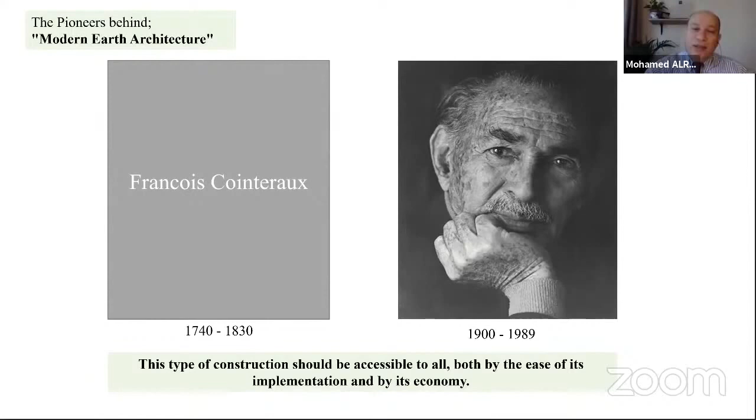And now, after hundreds of conferences held and tens of years passed and thousands of research papers carried out, and meetings and workshops, did we really keep or achieve the goals of those two legendary architects? Did we deviate from the route?

I'm sorry to say, unfortunately, yes, to some extent. This is my opinion. I will say why.

Because when we find this statistic - this is a very recent statistic - it says that we have about 150 million people living in the street without shelter. And we have 1.6 billion people living in housing that is not suitable for human habitation at all.

And this is totally against what they believed all over their lives. I wonder how we failed to secure proper houses for those people, and also how we failed to secure proper roofs for them.

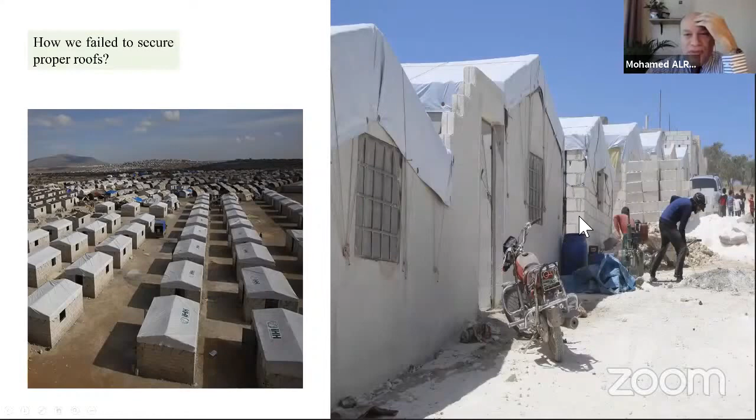These images show a camp for Syrian refugees held in the southeast part of Turkey. They constructed the shelters with concrete blocks, and they didn't find an appropriate material for the roofing. They used tents.

This makes me ask a question: Is it an affordable earth construction? Is it really an affordable technique?

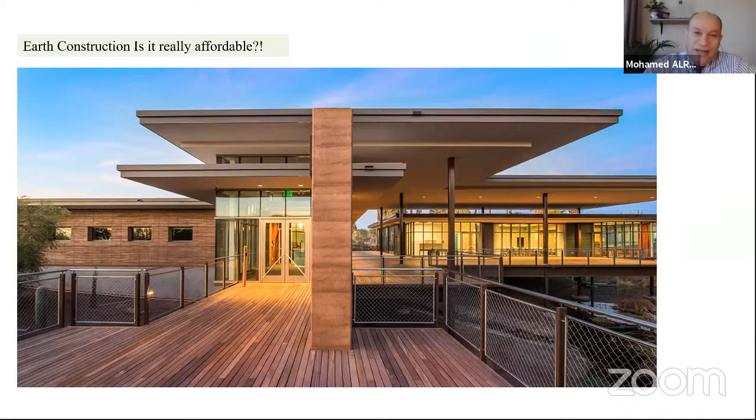The figures astonish me, when we find that the square meter of rammed earth construction costs about between $2,200 to $3,000 per square meter. Is it architecture for the rich, or what?

I have been working in this field for more than 30 years now, and during this time, I developed a formula to calculate the cost of producing compressed stabilized earth block. I was asked by the Saudi government in last March to apply this formula to calculate the cost of producing this material, compressed earth block, in a place called AlUla.

When we applied our formula and fed it with all the basic information regarding the basic elements influencing the cost, we ended up finding that we could produce 1,000 of these bricks for the amount of 474 Saudi riyals. This is about 52% less than the conventional or equivalent fired brick in this area.

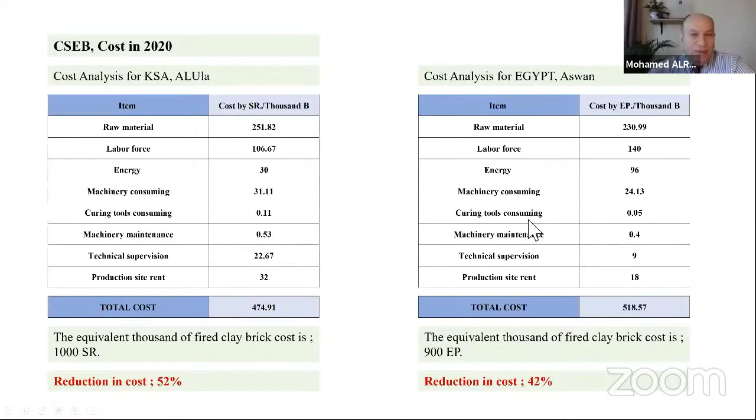So the problem is not related to the material itself. So what is the problem? There is a missing economical aspect here. There is a paradox, really.

When we think - and yesterday most of the presentations said that we are dealing with a most affordable material, it is widely available, and it's very cheap and costs nothing, and so on - so why do we reach the point that it causes these figures I mentioned to you? There is something missing.

Most of the applications we saw yesterday, and everywhere over the internet, don't account for the fact that the ceiling itself may cost about 60% to 75% of the total cost of the structure system. So it doesn't make sense to have just a wall of earthen material, and then construct your ceiling and other elements with different materials. You will never achieve a considerable saving for the total cost by just replacing the wall material.

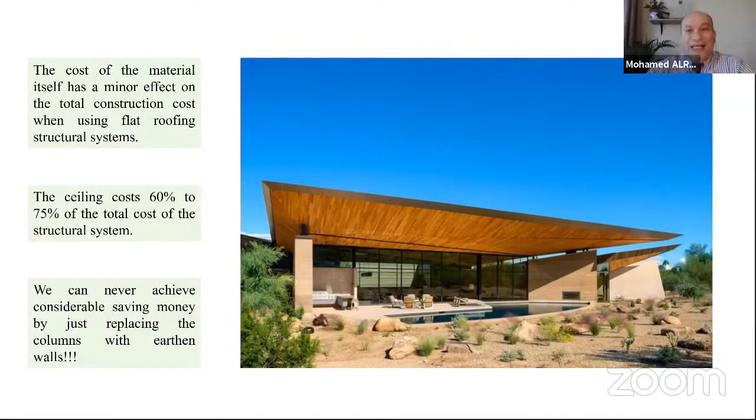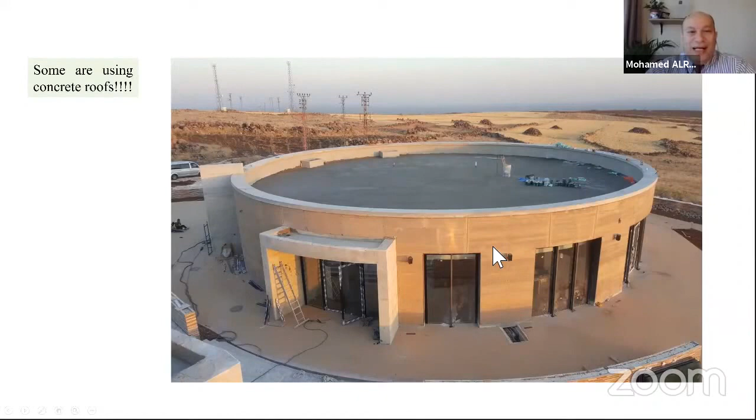And then you say, okay, I built an economical, efficient building. I really wonder when I saw some projects using reinforced concrete roofs over the earthen walls, and that's it. Some of them are using both reinforced concrete elements mixed with steel elements.

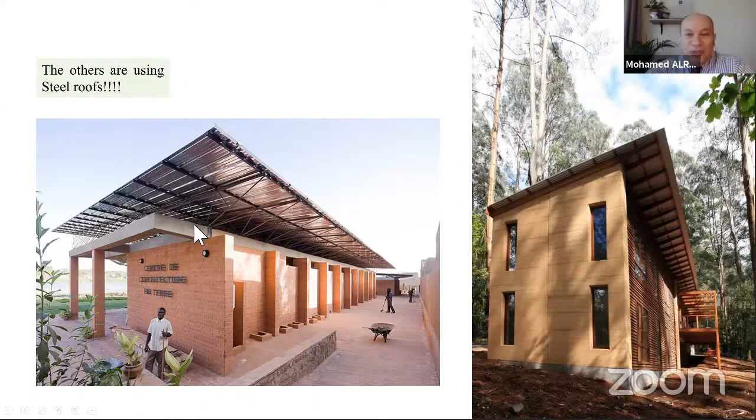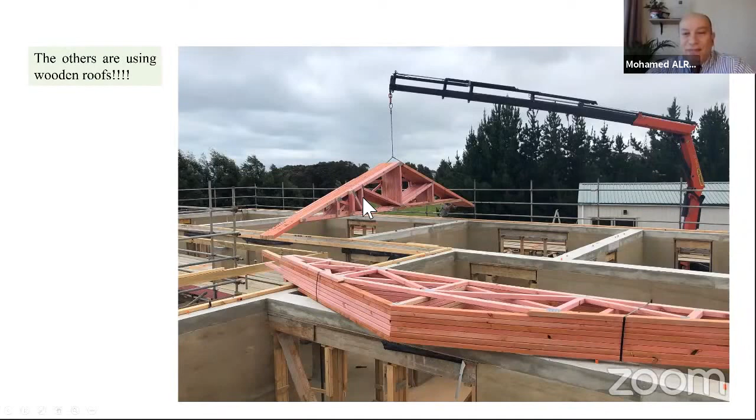By the way, this building is in Africa, and I have a project running now in Nigeria. I know well that this type of structure costs a lot for them because they are forced to import these materials from outside countries. Some of them are even using sophisticated space trusses made of wood. And for the extreme, some projects show that the wall is the only element composed of earth material—there's a steel structure and a flat slab of reinforced concrete for the roofing system.

Oh my God! So how could they achieve any saving or affordability?

To get close to this point, recently we made an evaluation for a prototype we designed for housing in Egypt, and we made three alternatives for this prototype. The first alternative, we designed it with a full reinforced concrete skeleton and used baked red bricks for walls. The second alternative, we used load-bearing baked red bricks, and for the ceiling we used precast ribs of precasted reinforced concrete.

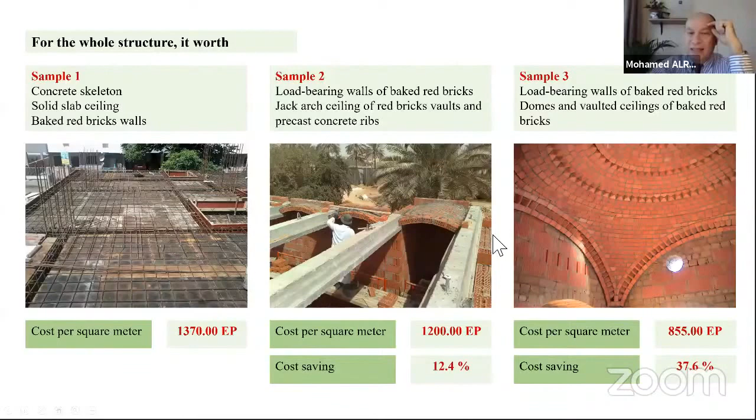It means that we could construct new buildings with earthen material, but with modern application of earthen material, at almost half the price. This is the answer to why it is not affordable, as shown by the new practices I showed you in the beginning.

On the other hand, this technique—most of you yesterday said it is the oldest technique, widely spread in old communities, very popular and vernacular—we took this technique from the hands of the locals. Our role should only be to develop the material and the process, not take it back from them, to be sure it would be proper for new construction but not too complicated. We should be enabling it, not complicating it.

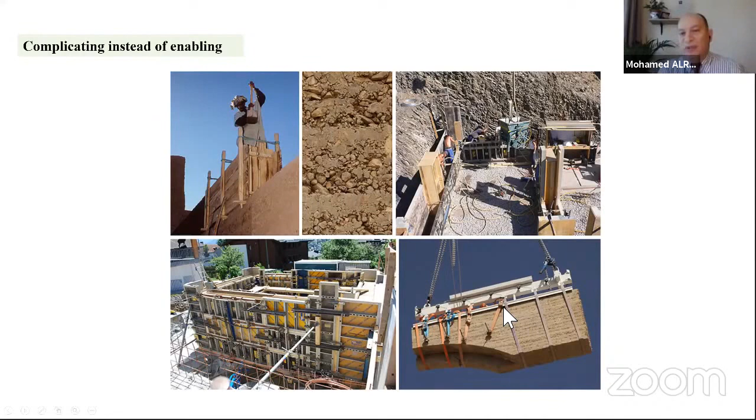It doesn't make any sense to use big precast pieces of rammed earth in construction and use sophisticated tools to do so.

What can earth construction do for locals? As I said, those people used to solve their problems and build without any intervention from professionals since long ago, thousands of years ago. Now, when we develop these techniques regarding material durability and so on, we should enable them again to participate in the construction process by making it easy and affordable for them. So I think modern earth construction should be committed to this goal.

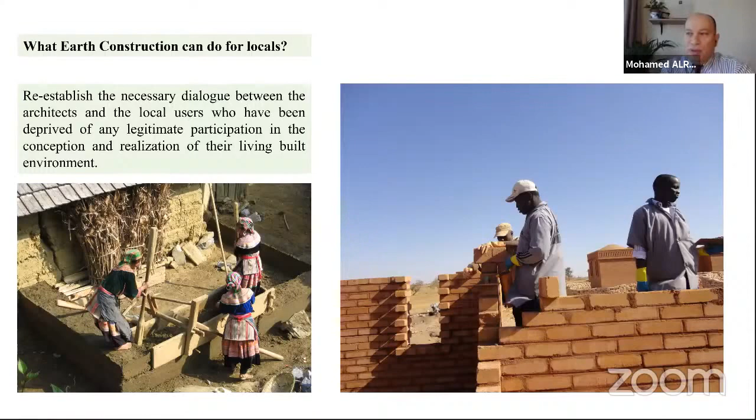What can this do and mean? I think modern earth construction means developing the practice from the vernacular, primitive, as most of you presented yesterday and some of you presented today, the adobe technique, to be professional and reliable.

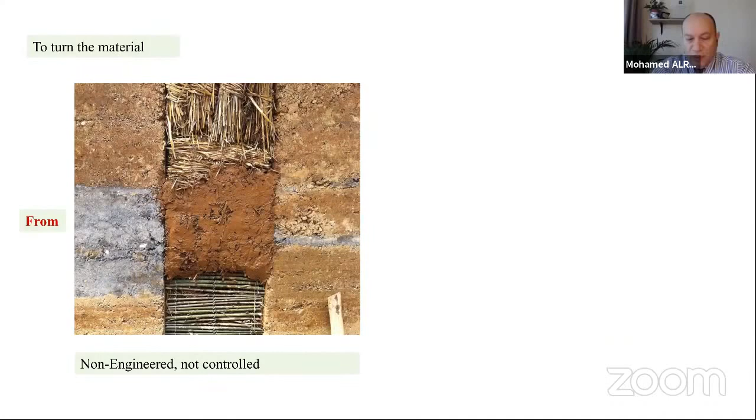And what about the material? We need to develop the material from non-engineered, not controlled. Most of you yesterday presented the damages affecting these materials from weathering, from water, and so on. So it needs to become engineered with controlled properties.

This is what we really mean by controlled properties. We need the material to act according to our expectations, and this is what we mean by becoming an engineered material.

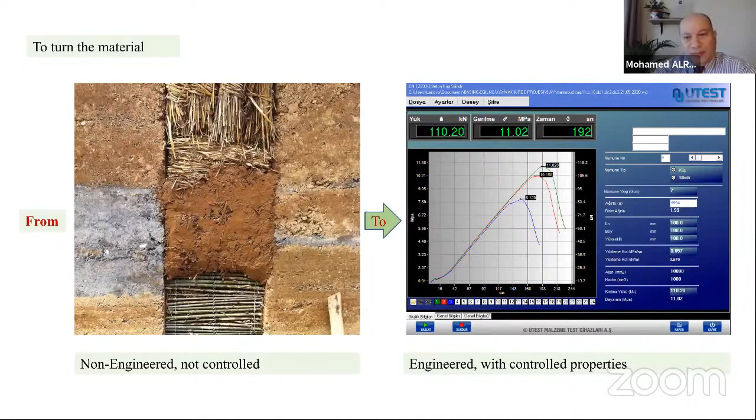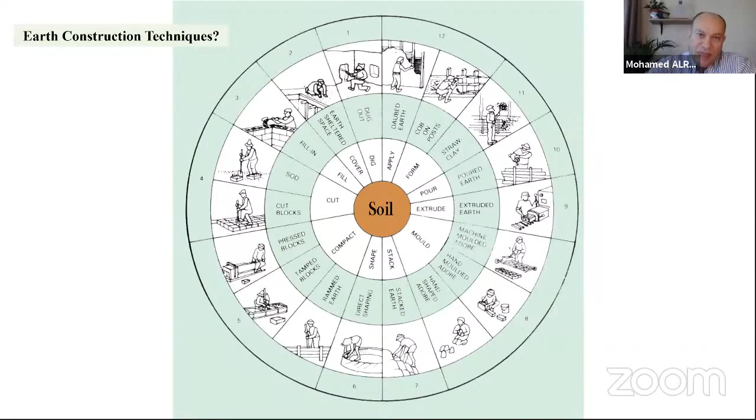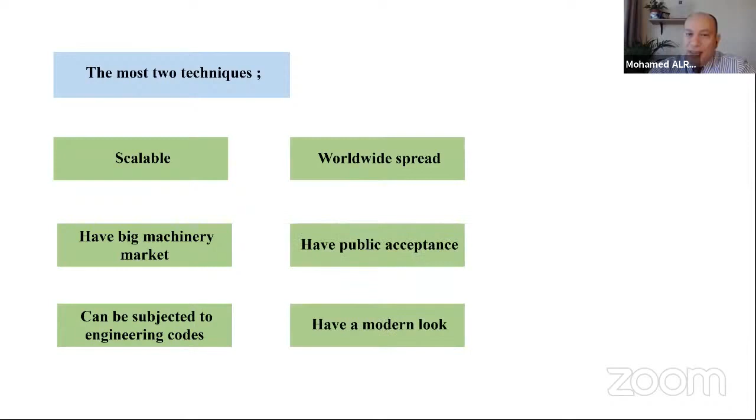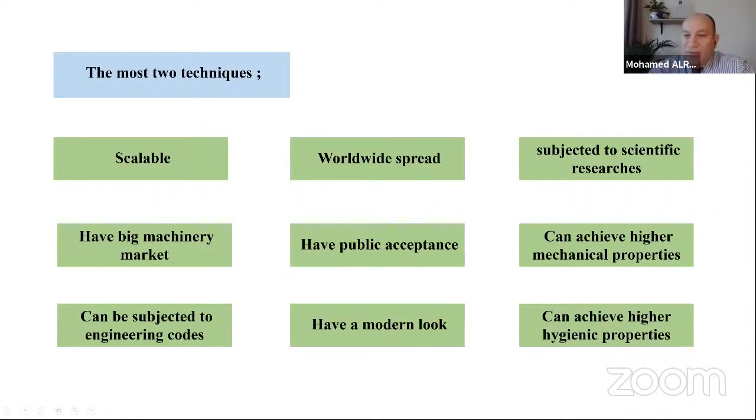Most of you maybe know that we have almost 12 different techniques of using earth in construction. But among all these techniques, we have just 2 that are scalable. They are ready to be developed, have a big machinery market all over the world, can be subjected to engineering codes, are worldwide spread, have public acceptance, have a modern look, are subjected to scientific research, and can achieve higher mechanical and hygienic properties.

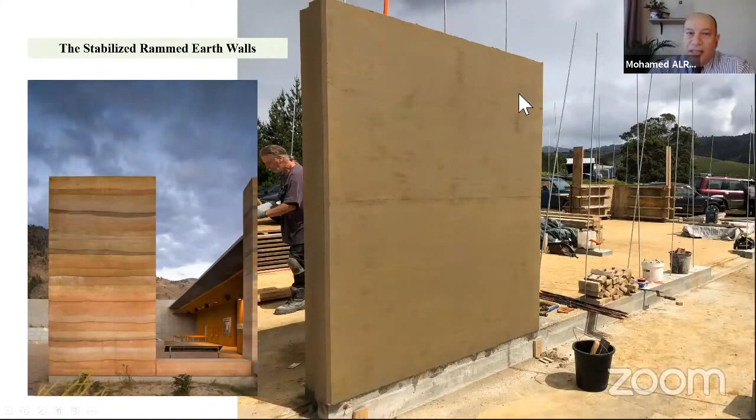Those 2 techniques are the stabilized rammed earth walls and the compressed stabilized earth blocks. There are common advantages of both these techniques.

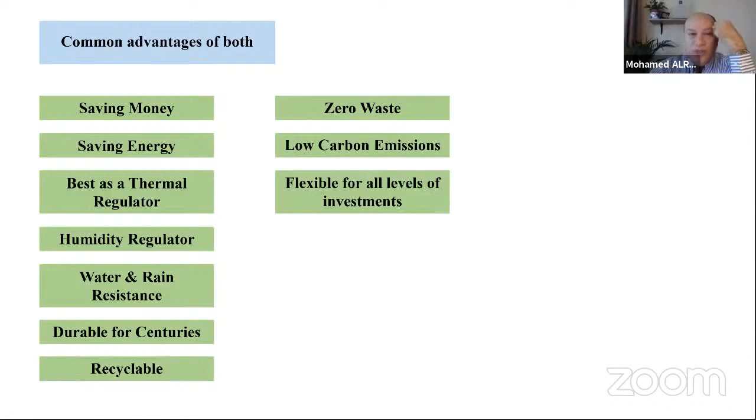They save money, they save energy, they are the best thermal regulators - I'm going to explain this point later - and they are humidity regulators. They have water and rain resistance, they are durable for centuries, they are recyclable, they have zero waste because they are fully recyclable, low carbon emission, and are flexible for all levels of investment.

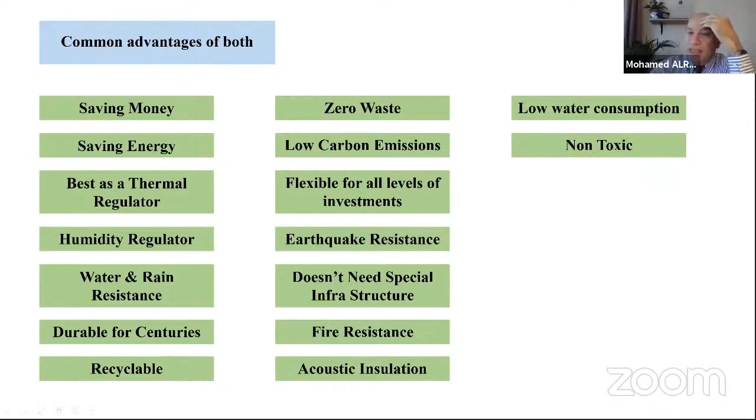They are earthquake resistant, do not need special infrastructure, are fire resistant, have acoustic insulation, low water consumption, are non-toxic, serve as a tool for community development, have simple technology, are easy for know-how transfer, allow on-site production, and are polymorphic. Those are the most common advantages of both techniques.

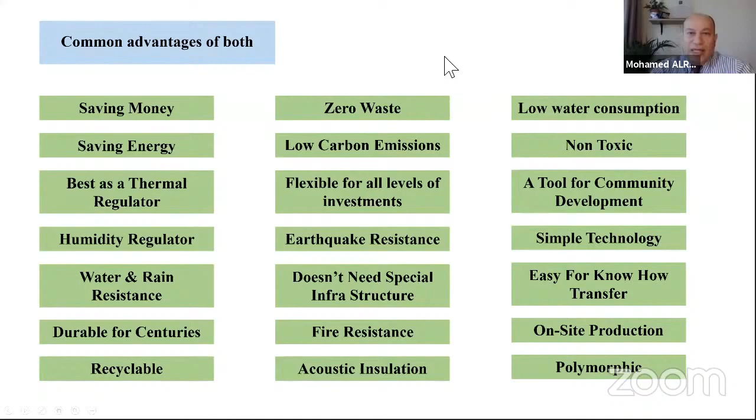But each one has its own advantages and disadvantages. Starting with stabilized rammed earth, what are the advantages of this technique? The major advantage is that it achieves high levels of aesthetics. It's really wonderful, it has a wonderful appearance, especially when we add some coloring oxides.

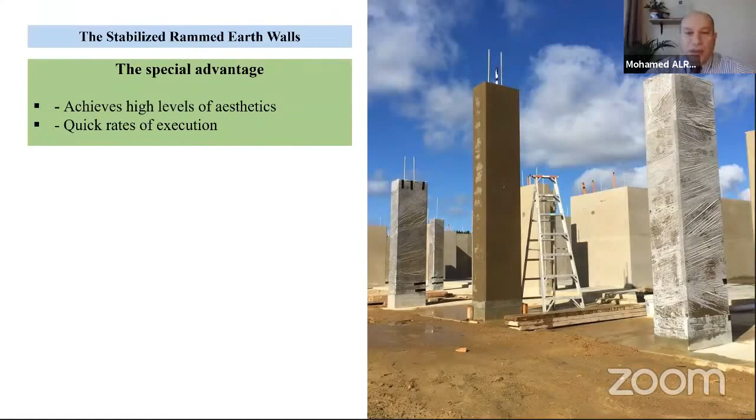When the natural soil becomes different in colors and so on, it gives us an appearance like marble or something like that. And it is very quick in application because you are casting big sections at once. But there is a special disadvantage - it still needs to be treated with this technique.

The first and most important deficiency of this technique is that, until now, it is impossible to make a test for a random sample. You cannot take a random sample of a wall, go to the laboratory, and test it under laboratory test equipment. And it is too difficult to make on-site quality control, because at the moment you remove the form, you already have the produced piece of wall.

So you cannot control during the process. You cannot control how much it is compacted, how much it is fully homogeneous regarding the material, and so on. And it is not suitable for curved roofs.

Remember what I told you in the beginning - if you would like to really reach maximum cost effectiveness and maximum reduction of cost, you have to use a monolithic material. You have to use this earthen material within the roofing system, also the roofing elements.

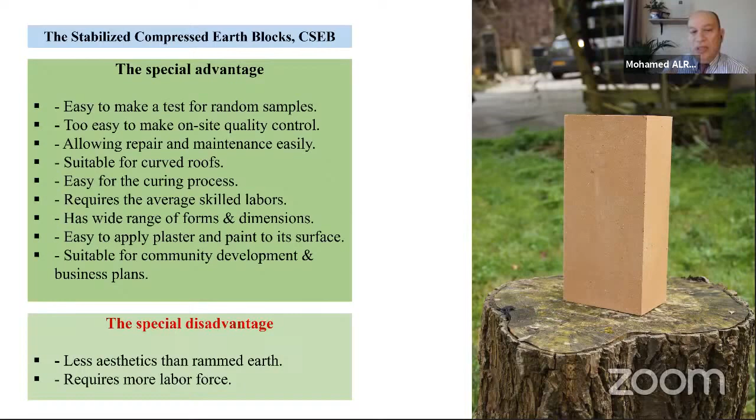In contradiction, the special disadvantage of this technique is that, unfortunately, it is less aesthetic than rammed earth. We don't have this magnificent surface, and it requires more labor force. This second disadvantage, by the way, could be an advantage when we are dealing with communities that have a lot of people who are jobless - so it could turn into a job for those people.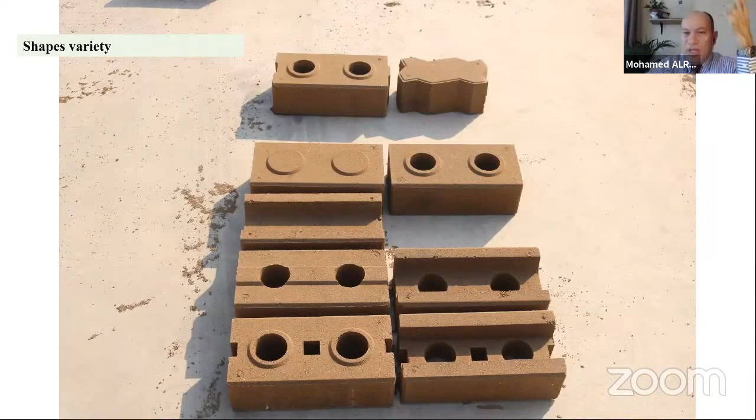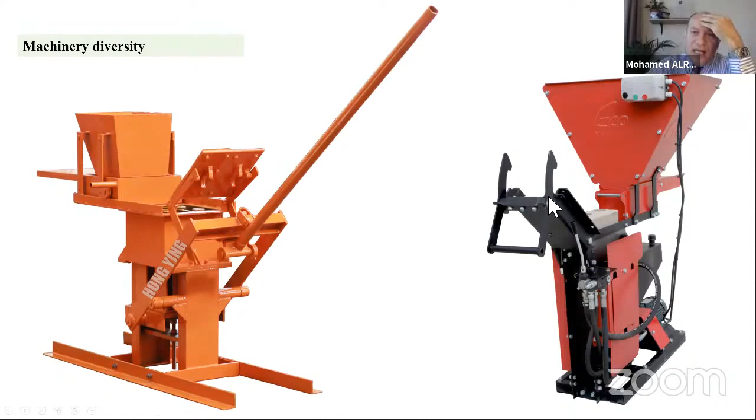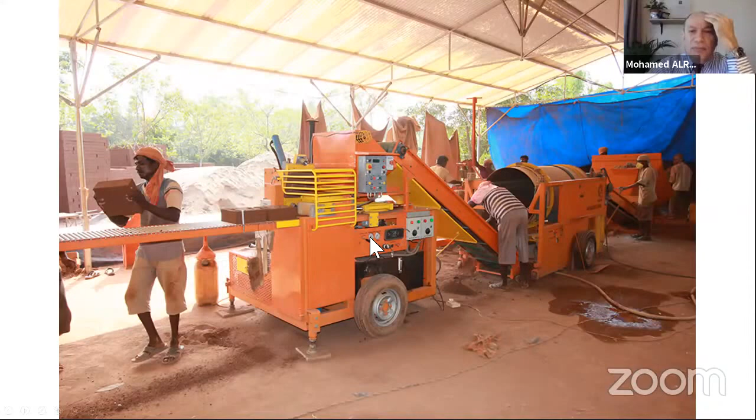There are plenty of machinery worldwide producing compressed earth blocks, starting from manual presses, simple hydraulic presses, to full production lines, like this one in Auroville, India. There are also mobile machines, which means you can produce on site easily - you can just drag it to where you would like to construct your building.

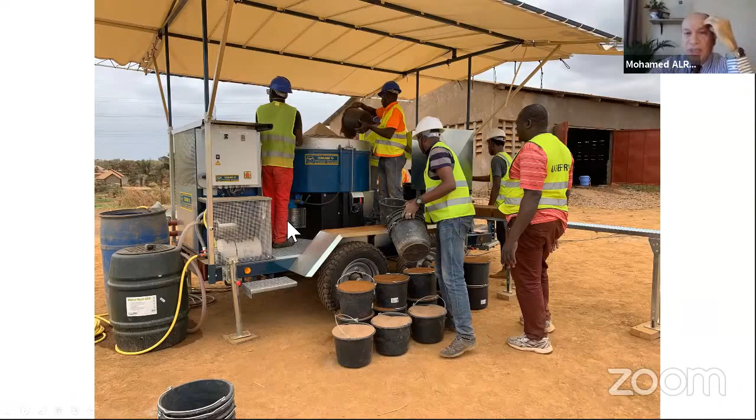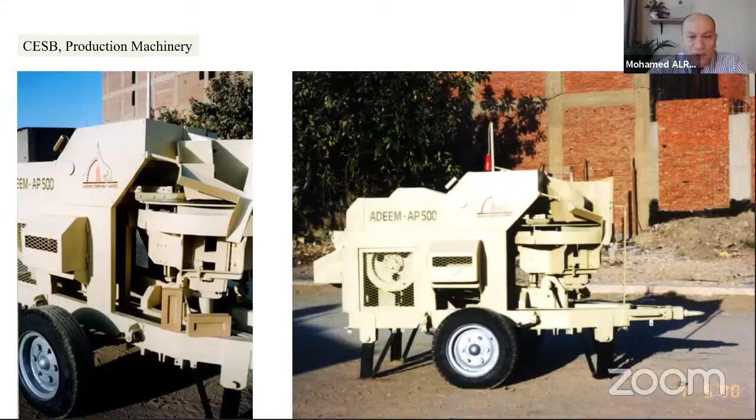And we produced those machines in Egypt locally. This is a good aspect of this technology - the machines are not sophisticated, and you can produce them locally. It doesn't need a sophisticated process; I call it intermediate technology. We produced it locally in Egypt with our labor force and our local materials - we produced the full machines to produce the compressed earth block.

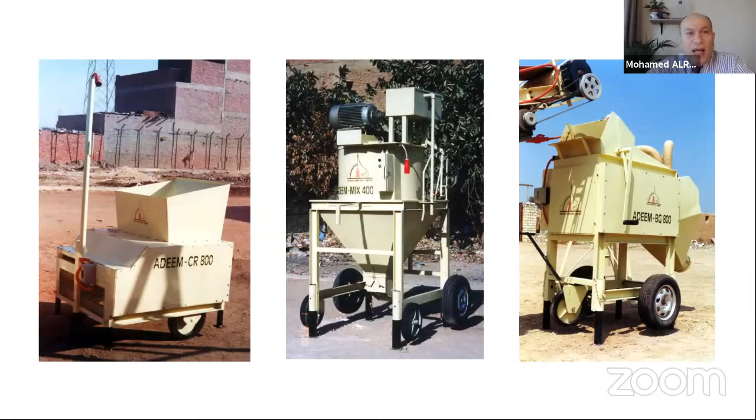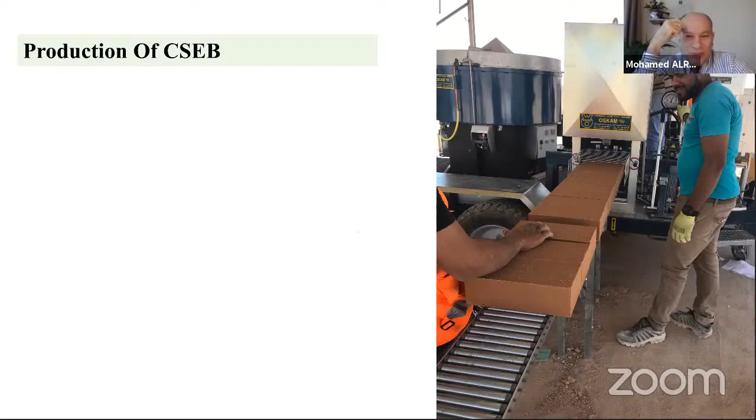Maybe I really, when I saw the presentation yesterday, and I saw most of the presenters focusing on Adobe, I said, okay, I should show them a little bit more about the CSEB production process.

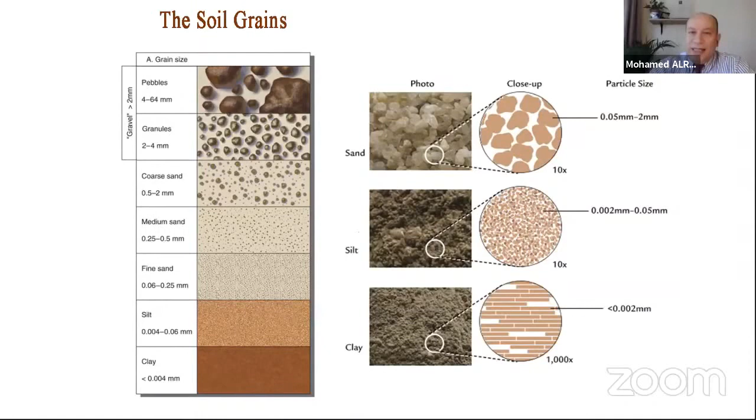Before we start any earth construction technique, we have to understand the soil well, from the physical and the chemical point of view. We have to make some analysis. There are two main tests we have to apply to the soil. The first one is the soil texture, which means the grain size distribution.

This grain size distribution varies from place to place, from one soil type to another. According to this test, we take a decision if we will use the soil as it is, or we may make some modifications for this soil later on.

The second most important test we have to apply to our soil is the X-ray diffraction analysis. It is a qualitative, not quantitative test. We have to apply it to understand what type of clay minerals we have, and this will help us define what type of stabilizer we are going to use to enhance the soil's properties. The stabilizer issue will come in the next slides.

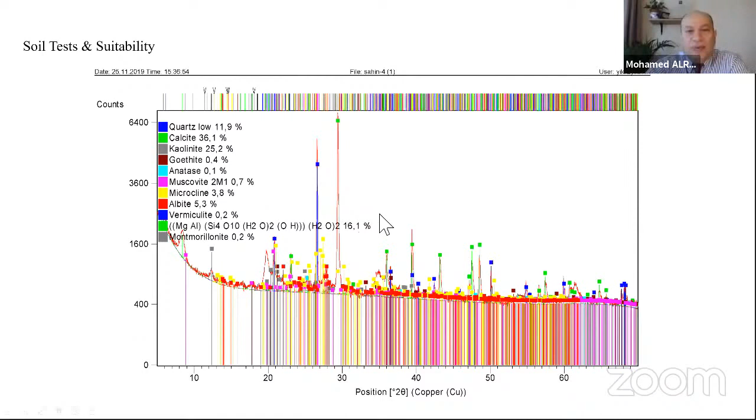There are so many stabilizers available to stabilize your soil and increase its properties. The first and most widely used, the oldest one, historical since Roman times, is the hydrated lime - calcium hydroxide. I say it in chemical terms because it has so many commercial names in different countries, so I'm talking about calcium hydroxide. It is scientifically proven, low economical cost, moderate environmental impact, and an excellent material that could achieve a high performance of mechanical development for your soil.

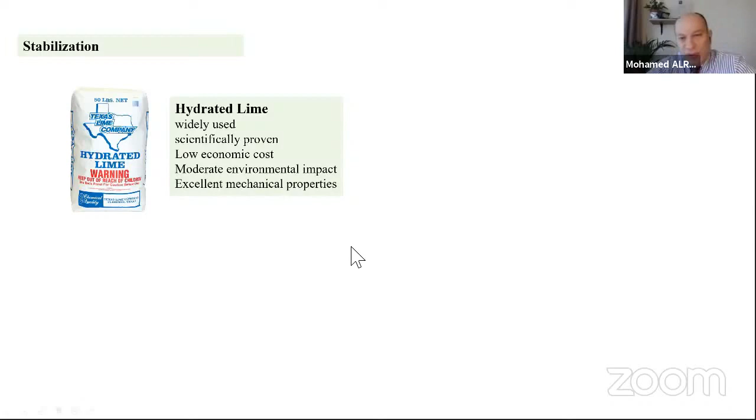The second stabilizer is cement, also widely used and scientifically proven, but it has a negative environmental impact - we know the problems of pollution that come from the cement industry. It also gives good mechanical results.

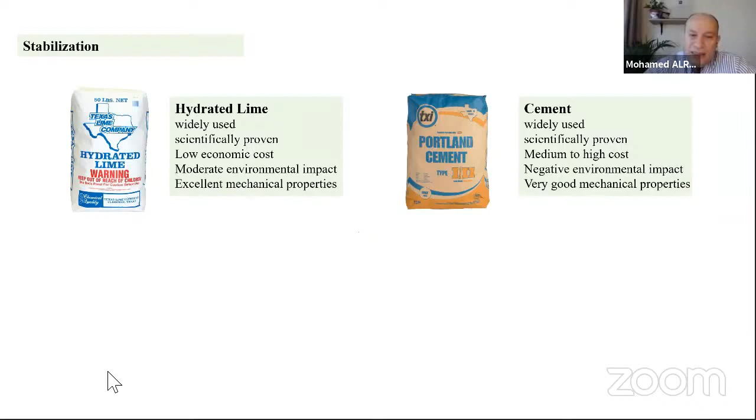The third one is magnesium hydroxide, commercially known as magnesium milk. This stabilizer is recently under research, because there are some disadvantages of using calcium hydroxide, and magnesium hydroxide is meant to develop and overcome these disadvantages. It has the ability to secure the mixture with maximum pH value, and it reacts very quickly and sufficiently with the clay minerals - this is a crucial reaction, the pozzolanic reaction. So it is still under research.

The fourth stabilizer is gypsum. Actually, I'm sorry to say that gypsum is not sufficiently scientifically proven yet. We don't know exactly what type of chemical reactions happen when you add gypsum to soil that contains a clay component. This is why I say it is not scientifically proven yet, but it was used, though it is not widely spread. If you search the internet, you will find very few papers talking about gypsum as a soil stabilizer.

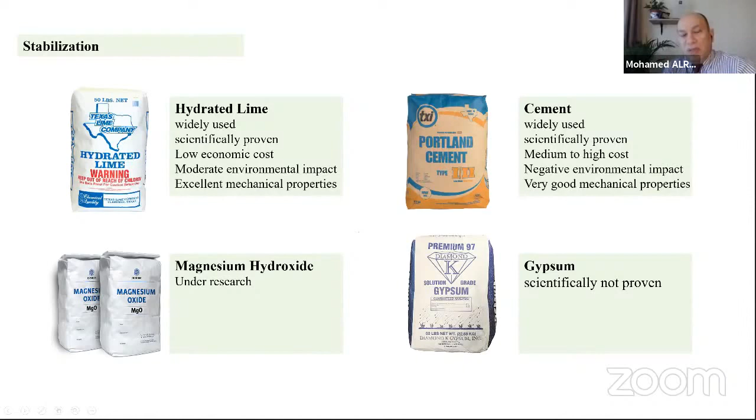What I mean by gypsum - the chemical formula is calcium sulfate. We also used it in recent research here at Fatih Sultan Mehmed University, and it was disappointing to us to see that it has no effect on the water resistance at all.

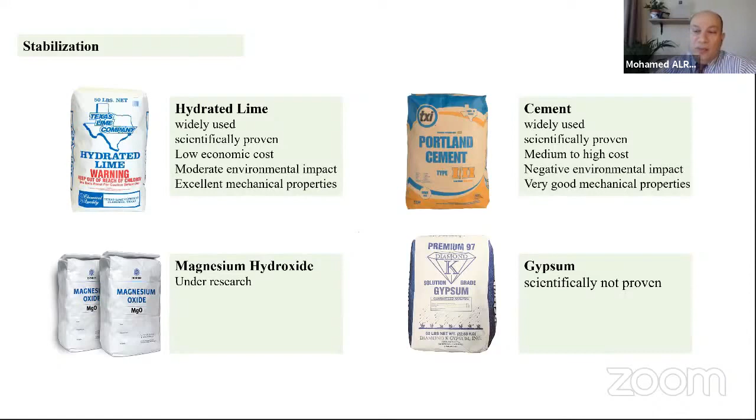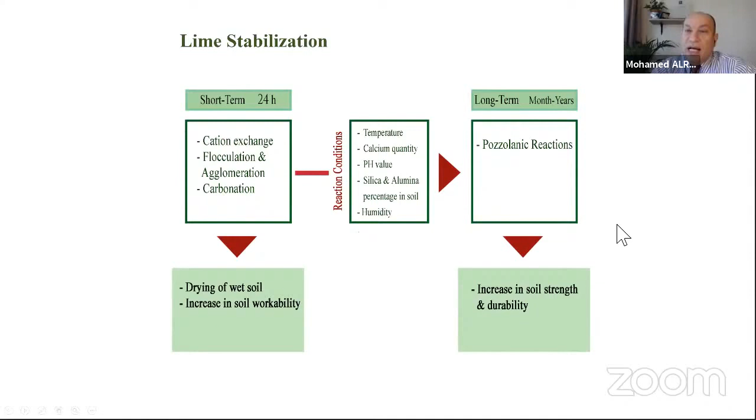This is the equation of how lime stabilization reacts with the clay minerals, passing through two stages. The first, short term, is carbonation, flocculation, agglomeration. Then we have the most important reaction, which takes a long time to occur - the pozzolanic reaction. This reaction results in a sophisticated formula of calcium silicate aluminate hydrate, a type of crystal which is very strong, and this is the element responsible for increasing the soil's strength, durability, and water resistance at the same time.

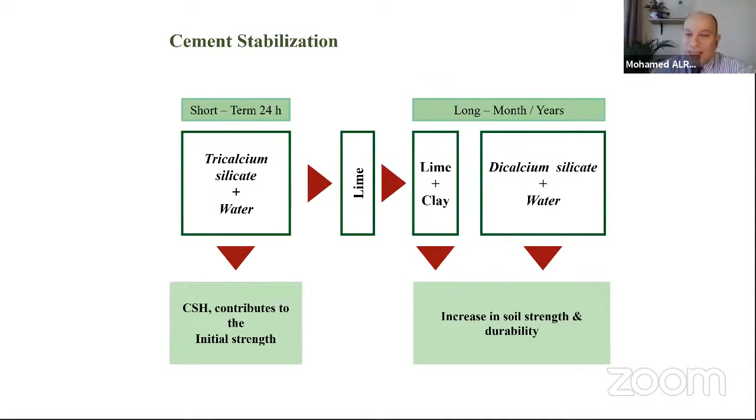And there is some lime lifted from the first reaction, and this lime goes in a cycle with the clay minerals, generating the pozzolanic reaction, and again this helps to increase the soil strength and durability.

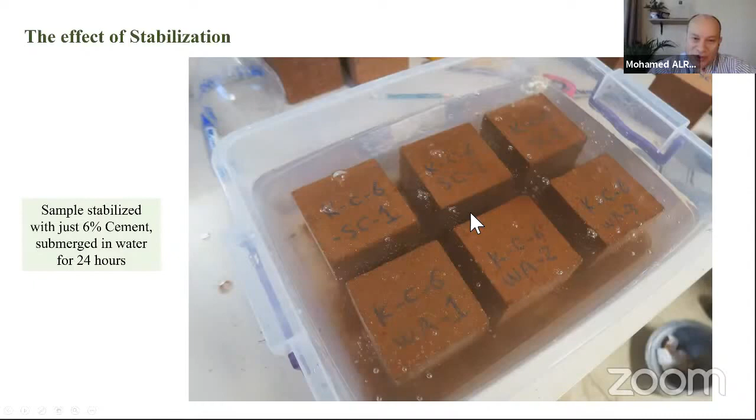To see the effect of stabilization, I'm showing you from our recent research these samples stabilized with just 6% cement. We brought local soil from the east-south part of Turkey and subjected it to stabilization with 6% cement. Then we left it for 24 hours, fully submerged in water. This is after 24 hours fully submerged in water - it didn't dissolve or deteriorate, no.

And here, the worst test, we subjected those samples to drying and wetting cycles 6 times. What are drying and wetting cycles? We submerge the samples under water for 24 hours, and after that we take it to the oven and increase the heat until we eliminate all the water and it becomes totally dry. Then we repeat this cycle again - submerge it in water, dry it, submerge it in water, dry it - we make it 6 times. This is a very severe test, by the way.

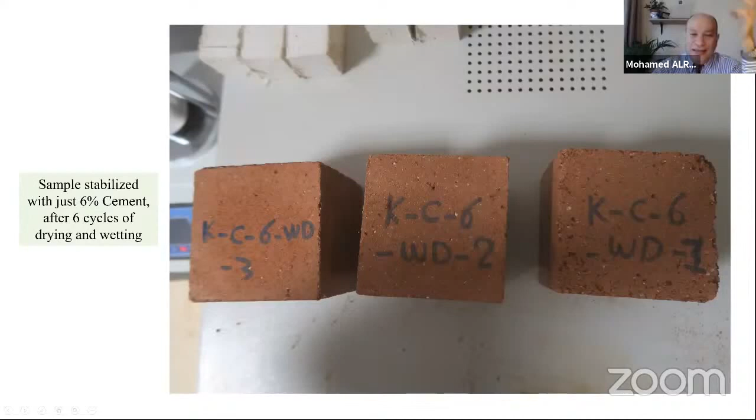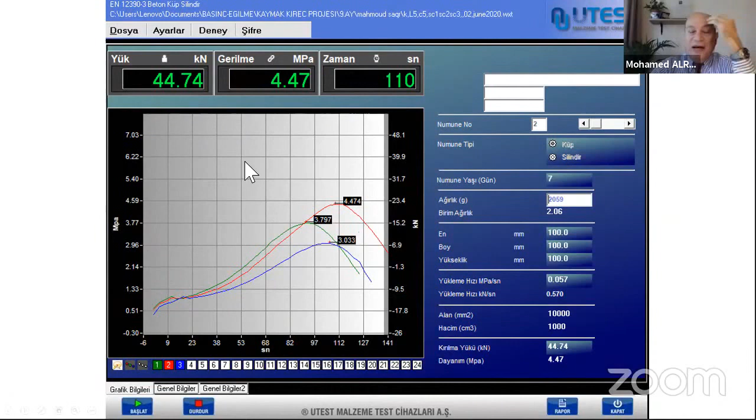Could you imagine this is the shape of the samples after all this severe test? This is the photo of the sample before we take it and crush it under the press. And when we pressed it, we achieved this amount of bearing capacity - about 45 kilogram per square centimeter, and this is more than enough after all these severe tests.

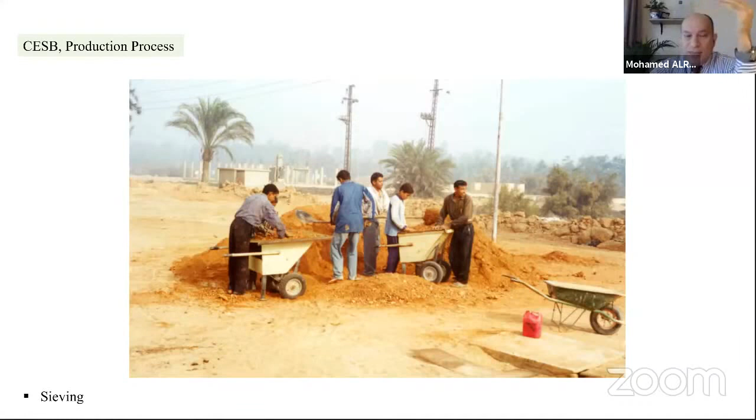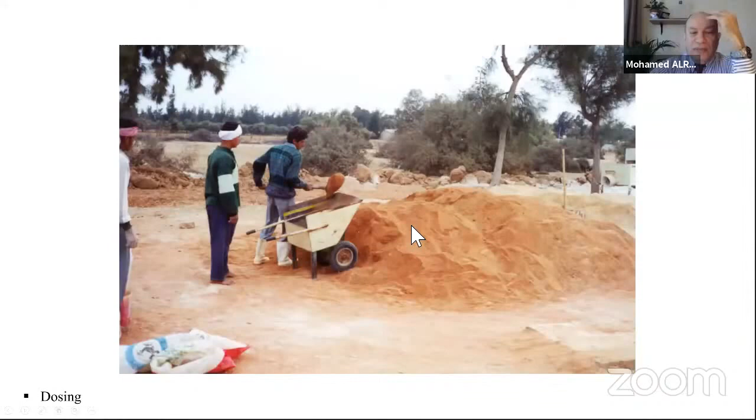Very quickly, I'm going to show you how we could produce the compressed earth block. First, we have the sieving - we have to sieve the soil to reach the optimum grain size distribution I showed you before. Then some lumps need to be crushed and ground. Then we make the dosing - we add the stabilizer and mix with a small amount of water.

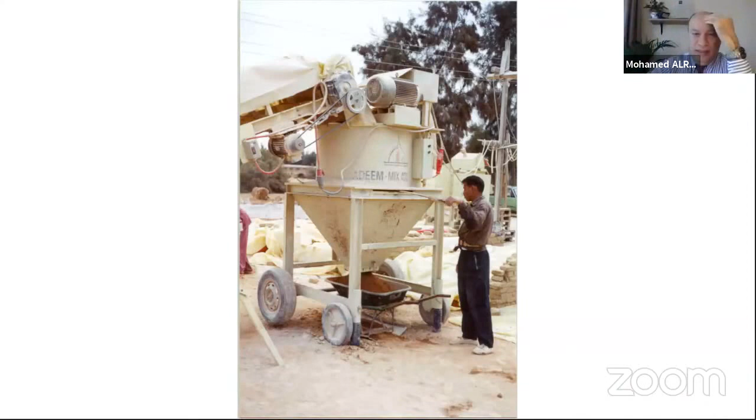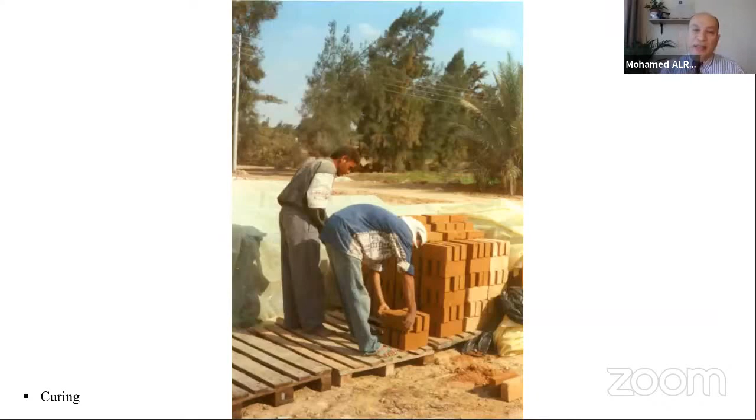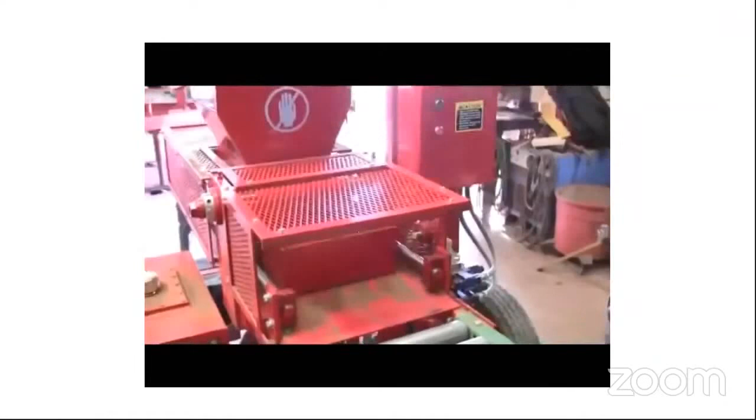Okay, I'm sorry, I'll move on. Just a little bit faster.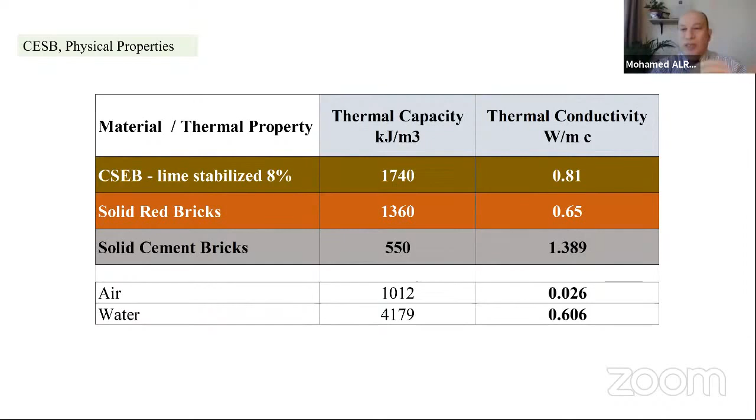Here I would like to say that this type of product should be dealt with as a thermal regulator rather than a thermal insulator, because normally when you press a material in a confined place, you are increasing the thermal conductivity, but on the other hand you are increasing the thermal capacity. This is a crucial point, by the way. This is the scientific explanation for why we say earthen buildings are warm in the winter and cool in the summer. I'm not going to explain it in detail, I'll move quickly.

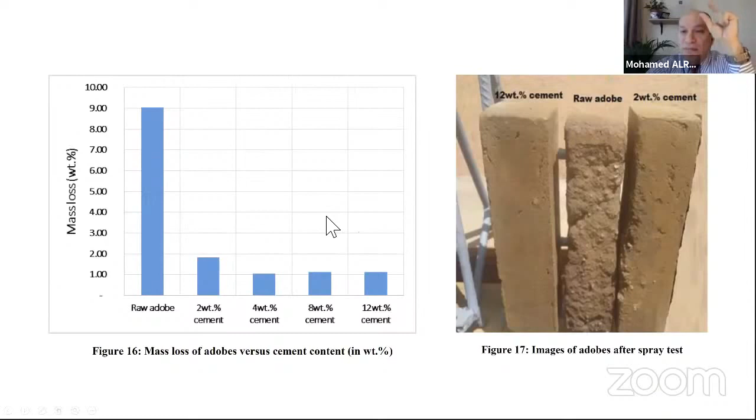Here we have the effect of just using a small amount of cement on the water absorption.

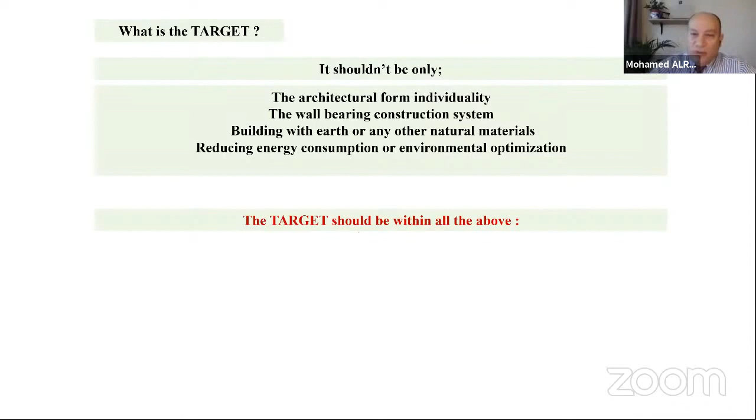And now I finished talking about the material itself. But we should ask ourselves why we are developing these materials and dealing with this research. The target is what? Is it to have a unique architecture form, or just using a wall-bearing structure system, or building with, or is it a target that we should use earth as a construction material, or reducing energy consumption? That's it? No.

Above all this, my belief is that we have to create an appropriate architecture. This architecture honestly responds to the users, their life features, their aspects, their culture, their economical, social and technical aspects and features.

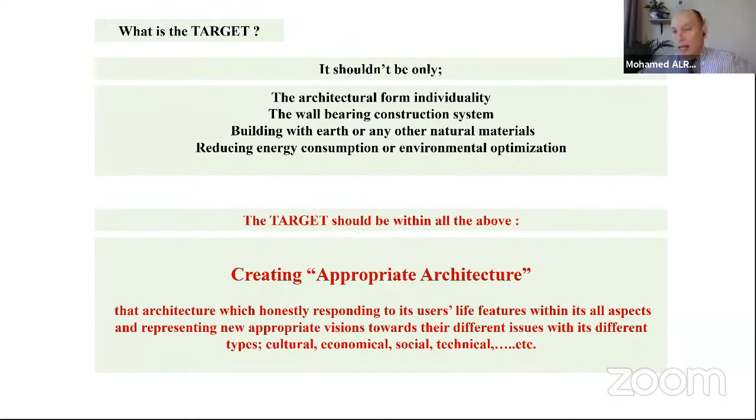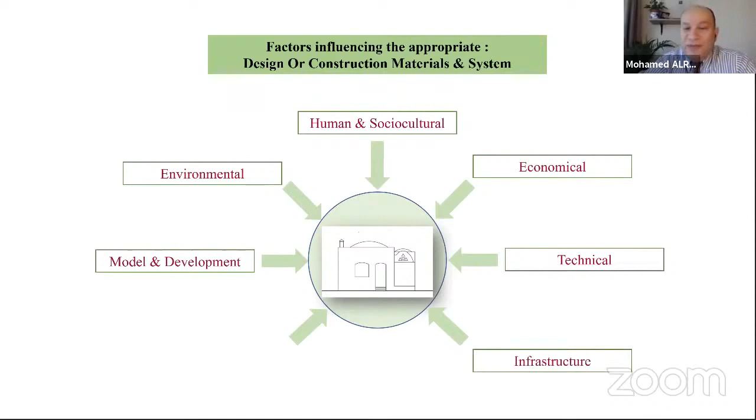I really feel that as architects we are like chess players. We should think about a lot of dimensions and titles affecting the process. These dimensions controlling appropriate architecture design, I concluded in six titles: the human and socio-cultural, the economical, the environmental, the technical, the model and development, and the infrastructure and legalization. I'm sorry, I'm not going to explain further.

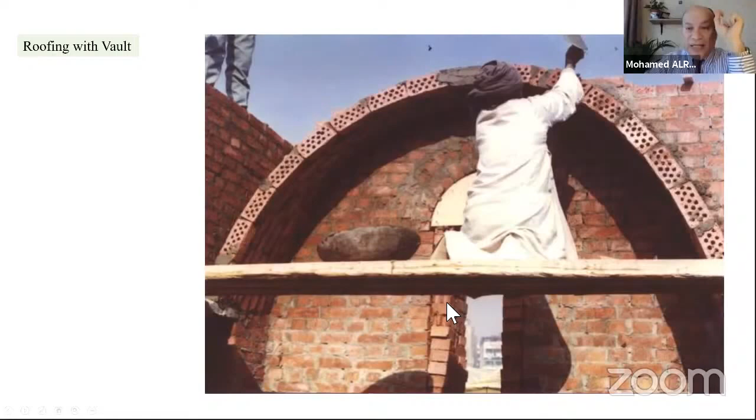I talked about just one element of the matrix, the construction material. Now we have to deal with the structural system and the architectural design. As I told you before, we can construct all our buildings using just bricks. I'm going to demonstrate that with just bricks we can cover any space. Don't look at the type of brick, because we could easily replace it - this is a red brick, but it could be a CEB brick or whatever brick we have. I would like you to focus on the structural system only.

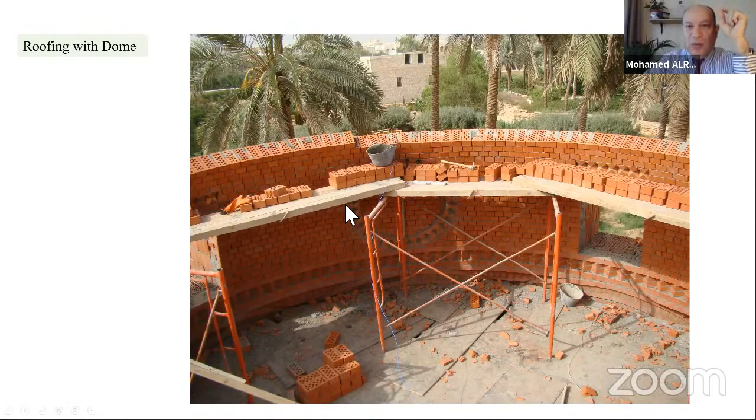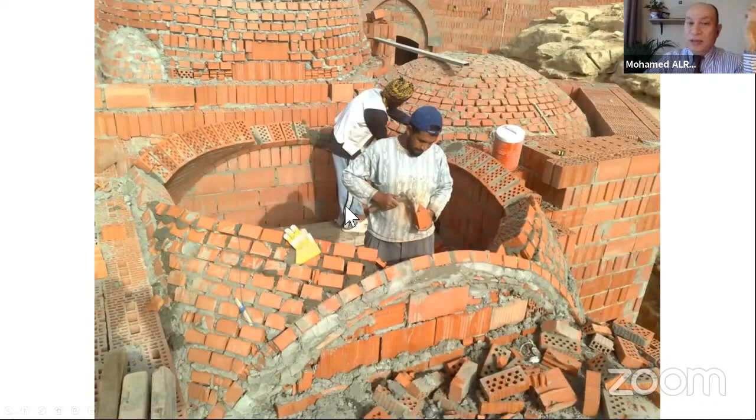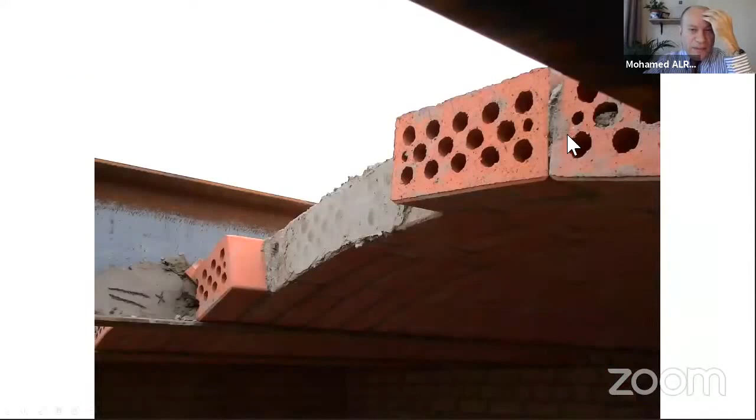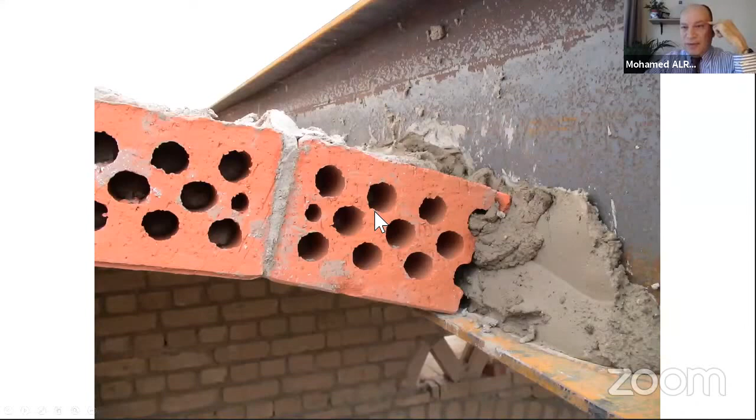We have domes with big spans. We have different types of domes - flat, square domes. We have intersected vaults. We have something called the jack-arch system, which is composed of segmental vaults standing over steel beams or reinforced concrete ribs. This is the image from inside. We can cover any space, any shape, with just using bricks only. We can make even the staircases.

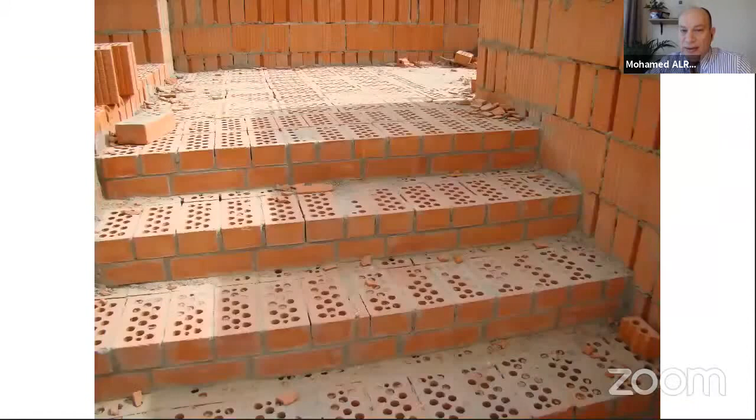Finally, we have the building material and the structural system. What type of designs could we achieve? This is a project I designed and constructed in Saudi Arabia, awarded the Hassan Fathy Architecture Award, and also nominated twice for the Aga Khan International Award. It is a farmhouse located near Riyadh city in Saudi Arabia, fully constructed using compressed earth block produced locally.

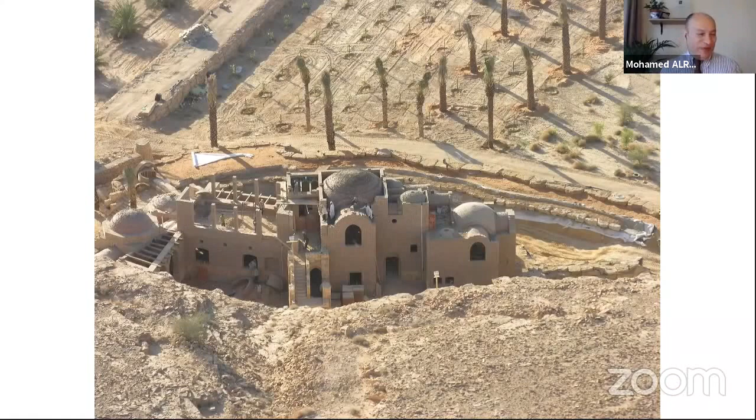I have just a few more. Okay, I will move it quickly. Behind here we have some schedule. That's it. Thank you so much for giving me this chance. I'm sorry for taking much more time than I had.

Okay, thank you. Thank you for your very interesting speech. I think nowadays, with this terrible pandemic and global warming and all these things that threaten human beings, it's very important to use earthen materials which are more sustainable and have less threatening effects for the environment. So thank you for your very interesting lecture. Thank you so much, and congratulations on your interesting design of the house.

Thank you. I liked it. Thank you.